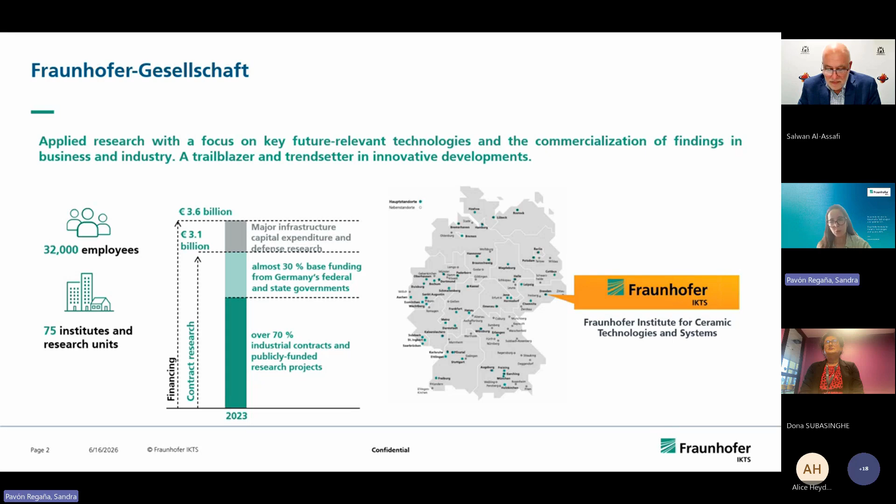As an applied research center, we go through the complete value chain, solving real problems from industry. Fraunhofer is around the world, especially in Germany. You can see in the map all the sites and institutes we have. We are 75 institutes within Fraunhofer society, more than 30,000 employees around the world, and I belong to the one on the right side, in Dresden, the headquarters called Fraunhofer IKTS.

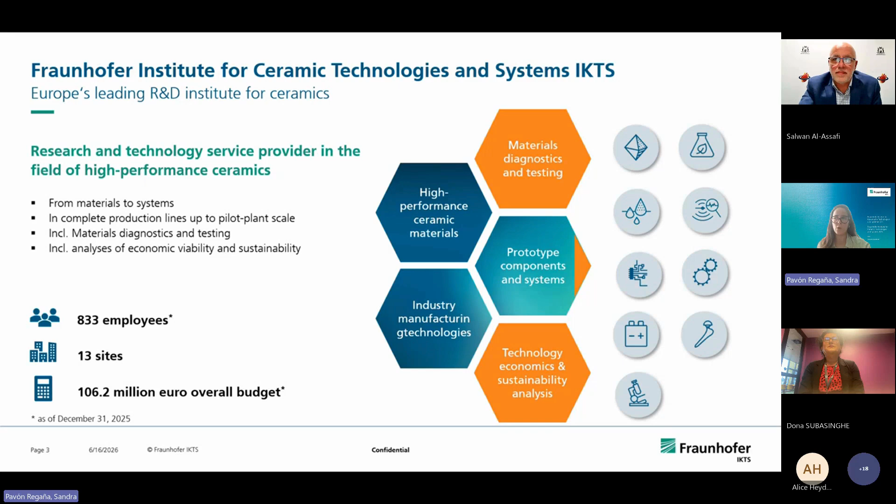What we do in IKTS focuses on developing ceramic materials, hence the name ceramic technologies and systems. We don't only focus on material development, we implement it across different value chains, in production and also in recycling. We are a little bit more than 830 employees, and from Fraunhofer IKTS alone we have 13 sites. I belong to the headquarters, but all the pilot plants we have in recycling are close by. I'll give you an overview a little later.

How we collaborate with academia as well as industry is by establishing collaboration and complementary synergies. We've done this since Fraunhofer started, because especially in Germany, academia is really strong. So we develop the fundamentals first, usually the focus of different universities, and then we apply and validate the ideas in the Applied Research Center, in Fraunhofer, bridging the gap between university and industry to provide not only the solution but also all the related IP. This duality and complementary synergy is our daily basis, and we think this can be a good start in Australia too.

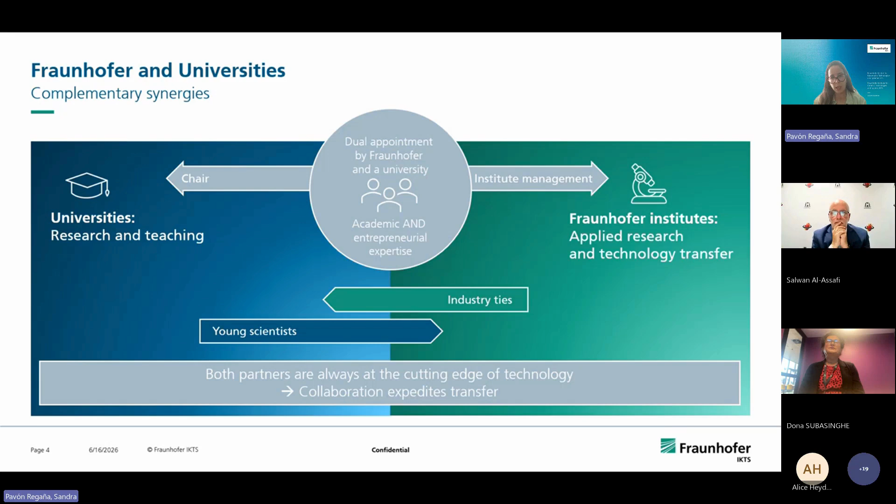Especially in Germany, where I work in Fraunhofer IKTS in Dresden, we have a strong collaboration with two different universities. One of them is the university in Dresden. In fact, the head of our institute at Fraunhofer IKTS is also a professor there, which is why the collaboration is really strong.

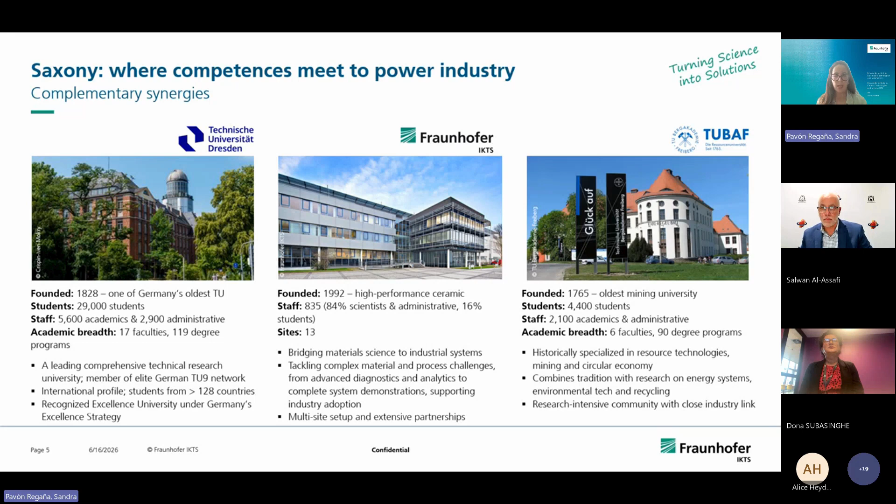Also from a recycling point of view, where I'm placed, all the recycling pilot plants are really strong in Freiberg, the oldest mining university. We have different collaborations and synergies there for developing the complete value chain, trying to tackle all the challenges from material development until production, including recycling, to fulfill circularity and the challenges of the energy transition.

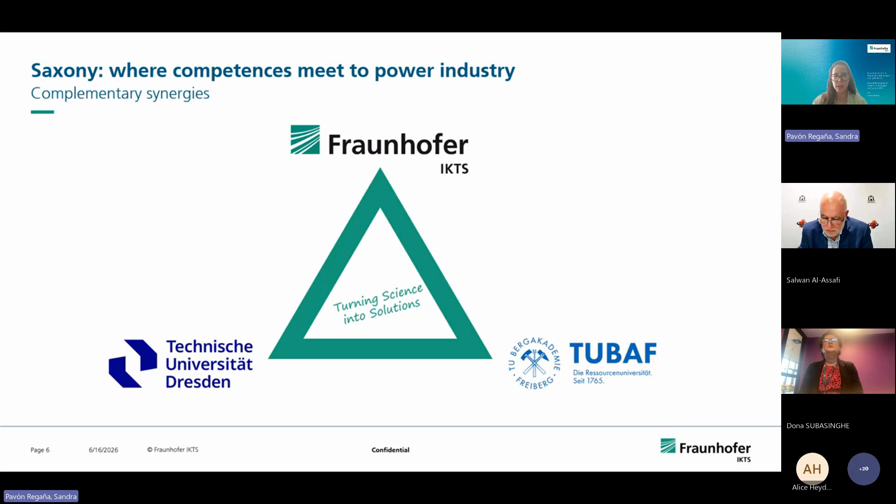That's why we're trying to be more present in Australia, to understand how the market is, and trying to provide and establish the same thing we already have here in Germany, but also synergies and partnerships.

How do we develop from scratch until industrial implementation? We start from the idea base, trying to develop an alliance. Usually the company comes to us and tells us what the challenge is. It can be different ones, from a technology point of view to how to adapt the process and value chain they already have, but with new input material - how to adapt current processes and technologies in their facilities with the new input material we want to test.

Then we establish R&D projects, and we provide all the guidance through the entire value chain, establishing this partnership. Once the idea is validated at laboratory scale, we move to the next phase: prototyping the solution in a pilot plant, including techno-economic balancing. Without techno-economic balancing, industry is gone, so we have to implement that from the beginning.

From primary and also secondary sources, we believe our idea and our strategy is trying to develop holistic approaches. What I mean by holistic approaches is that regardless of the input material we have, we are trying to develop the complete value chain.

We believe technologies should be flexible, because the raw materials we have today won't be the same in 3 or 4 years, especially from a secondary sources point of view. All the production and technology from the production side is developing and evolving through time, which means our recycling facilities have to be ready from the starting point to tackle the challenges and solutions of tomorrow. So we are developing different technologies and circularity concepts.

We take into account the planetary boundaries, so all the regulations - especially for us, usually Europe - but this is not the only main regulation and jurisdiction we have in mind. And when we're developing everything, we try to automate as much as possible.

We try to develop all the metrology, sensing, and digitalization from the beginning in order to have full control of the full pilot plant in the facilities of the clients. This means we are tackling primary sources and also secondary sources from end of life products, as well as production waste.

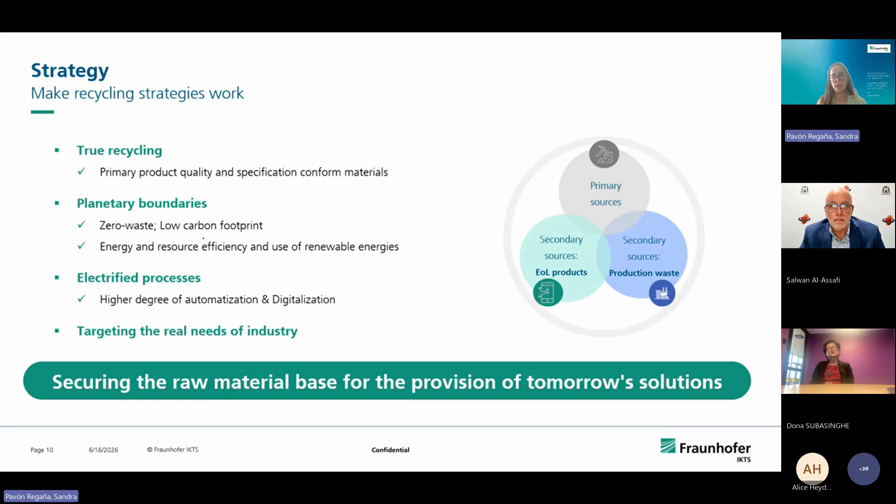The sustainability and cross-sector solutions for water, energy, and food security is a mantra for us. In order to implement in the industry and tackle cost efficiency in recycling processes, we have mainly four research areas. One of them is closing the loop.

All the waste produced through the process - we try two different approaches. One is trying to recirculate this within the same process, or we try to make this waste transformed into a resource for another industry. So we are selling this waste product that for us is not waste, because it's already a resource.

The second one is smart processes. Like I already said before, we try to include digital monitoring to optimize the processes and material recovery. So from the beginning, we try to establish digitalization from the start.

Usually when clients come to us, they already have something in their facilities, so it makes no sense to start from scratch or start from the beginning and do everything new. We try to adapt the already available technologies, facilities, and pilot plants they have, in order to reduce complexity as much as possible and increase cost efficiency.

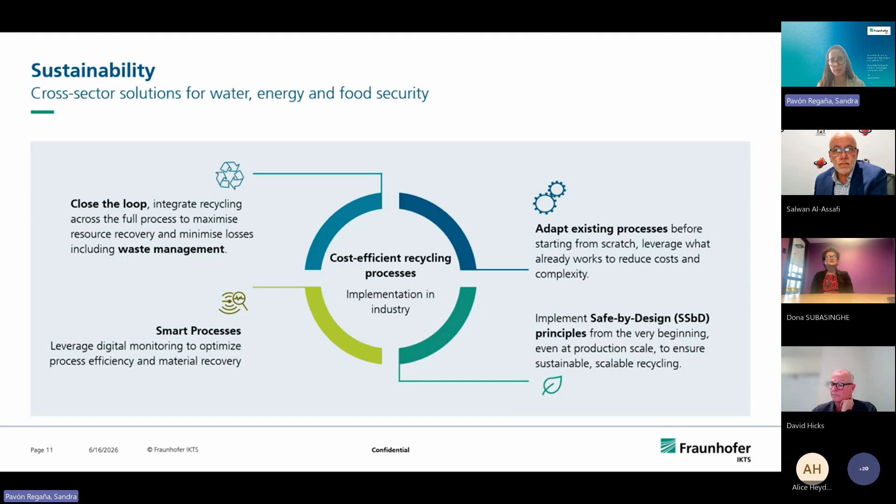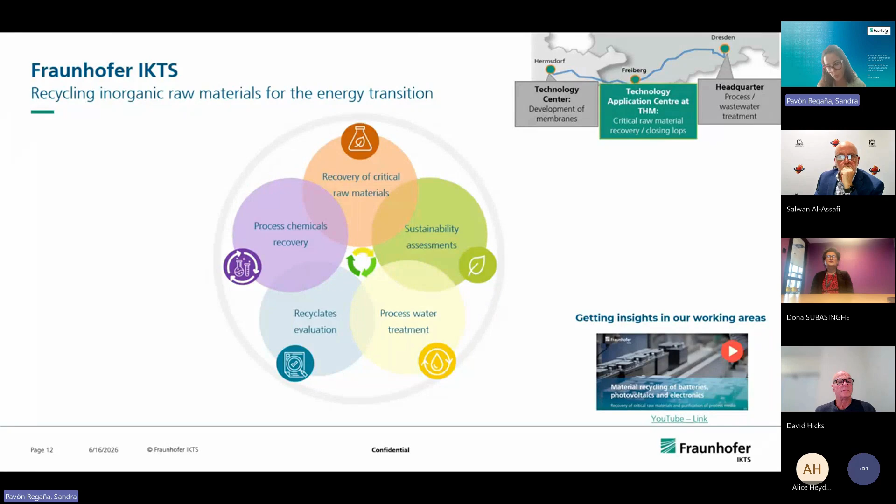Obviously, we are focusing on hydrometallurgy - hydrometallurgy means water, hydrometallurgy means chemicals. In lila and also in yellow are really key areas where we are really good at. We have all the facilities for process water treatment as well as process chemical recovery. And afterwards, we are doing the assessment - LCAs, LCC, and TEA, techno-economical assessment as well.

So which technology do we have in order that you can see if this can be useful for you and for your challenges. I'll try to summarize - obviously we have more than that, but I try to summarize to not talk for 4 hours. One of the main cores for us and the main areas that we have is lithium.

We have 2 processes that we can run in a semi-pilot plant. So we have the COOL process, the one that I will explain later - that is the use case that I already selected for today. We have a 230 liter autoclave in our facilities, and this process is already patented by the University of Freiberg, and we are the ones responsible for the validation from primary as well as secondary sources. So that means it's a holistic approach.

And we have a second one that is jointly patented, called the FEEL process, patented together with the University of Freiberg, but IKTS was also involved here.

From the metal separation side, we have the common technologies - solvent extraction in batch modus as well as continuous modus, including membrane contactors. It makes sense because we have a site that is developing the ceramic membrane contactors. Then we have ionic exchange, precipitation, complexation, crystallization, and so on.

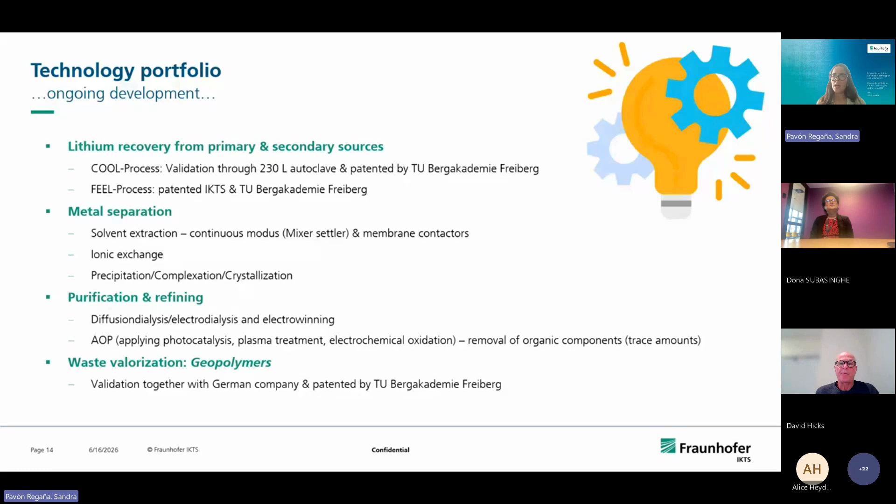And the last one that I think is important for you, or where I think there could be some questions, is how to valorize the rest when we are talking about primary sources. We are already working with geopolymers - I will explain what these geopolymers are afterwards.

So from a purification and water point of view, we are considering water as a resource and not as waste. That means we are trying to clean this water once it's already processed through the different processes we are developing, and we are trying to reintroduce this water within the same process.

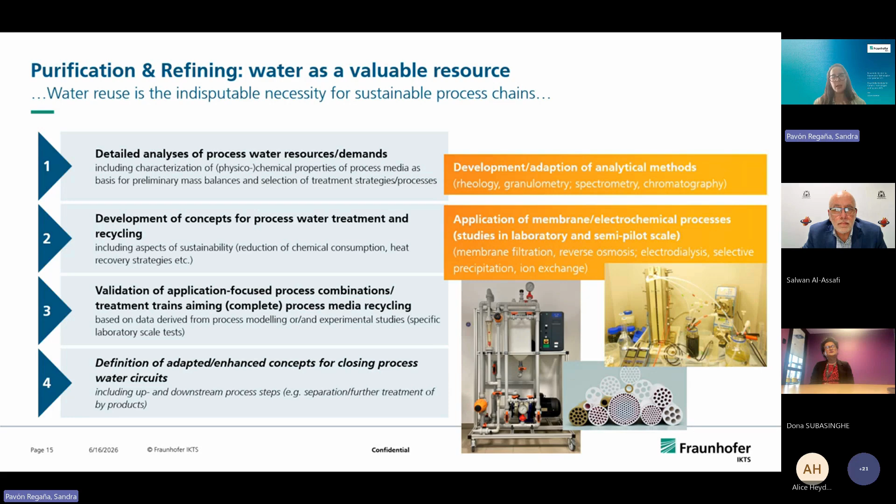We have here some application membrane pilot plants, semi-pilot plants, and we can tackle all the steps in the value chain. So we can develop the membrane contactors ourselves, and handle the setup until the end. We are responsible for making all the setup from this semi-pilot plant, and also for using them and validating the process.

From the assessment point of view, how we are working is we try to monitorize - meaning we introduce all the engineering side for monitoring. Then we do modeling and visualization tasks for evaluating the different scenarios. And when we are evaluating, we can identify where the process can be optimized.

And this is not only once - I want to tell you that this is an iterative process. We cannot only do this once and that's all, because obviously we are running the process in client facilities with different input materials. Input materials can be similar, and already are similar, but will never be the same input material, and that is why we have to iterate that.

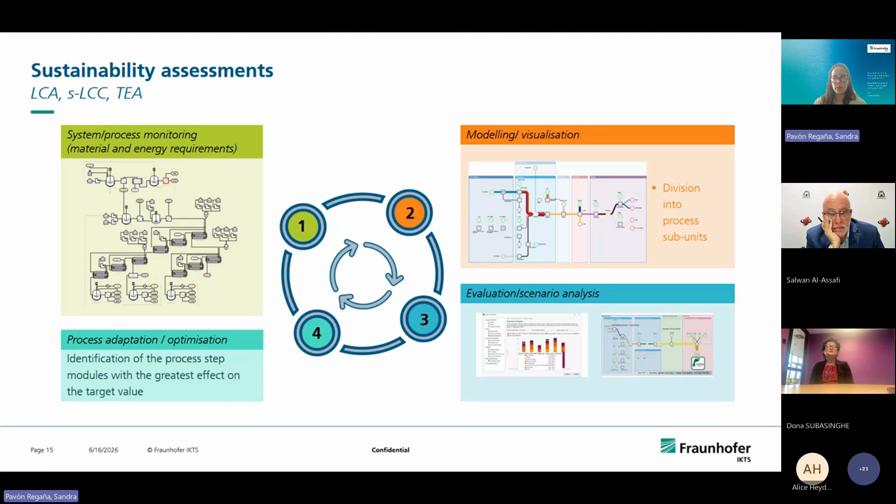So now I would like to go through the use case that I already selected, and I focus on lithium. Why am I selecting lithium? 3.5 years ago we started this big European project called Metallico.

To boost the energy green transition, critical raw materials need to be ensured, especially in Europe, where we don't have so much primary access. So we wanted to have a project to recover these battery metals from primary and also secondary sources, secondary sources meaning tailings.

The objective for us within this project is to recover these valuable materials from primary and secondary materials. We are demonstrating sustainable production because at the end of the project we are at TRL 7, meaning full pilot plants, or at least that's what TRL 7 means for us, it's a scale thing.

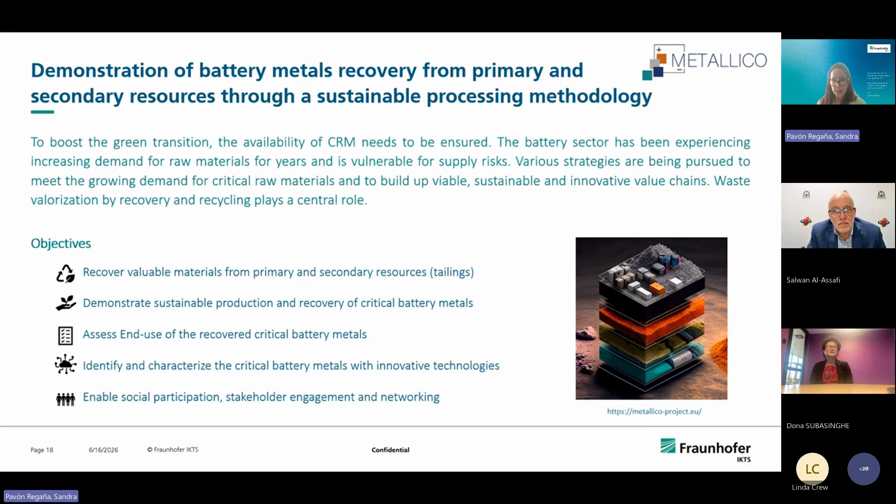We are also integrating and enabling social participation and stakeholder engagement. This is really important, especially in Spain, where the coordinators are placed. We have different mines, but not all of them have the green light and permissions to open. So we wanted to engage people to understand what mining means and try to get rid of the concerns they have.

The energy transition and electromobility is one of the cores, and batteries are one of the key resources. If we look at a schematic battery on the right side, from the 34 list of critical raw materials from Europe, you can see that almost all of them are in red, meaning all the metals except aluminum are critical, both from a supply risk and strategic importance standpoint.

So if we want to continue developing batteries and also recycling them, we have to tackle all these metals, including the main ones: lithium, manganese, copper, nickel, cobalt, and graphite.

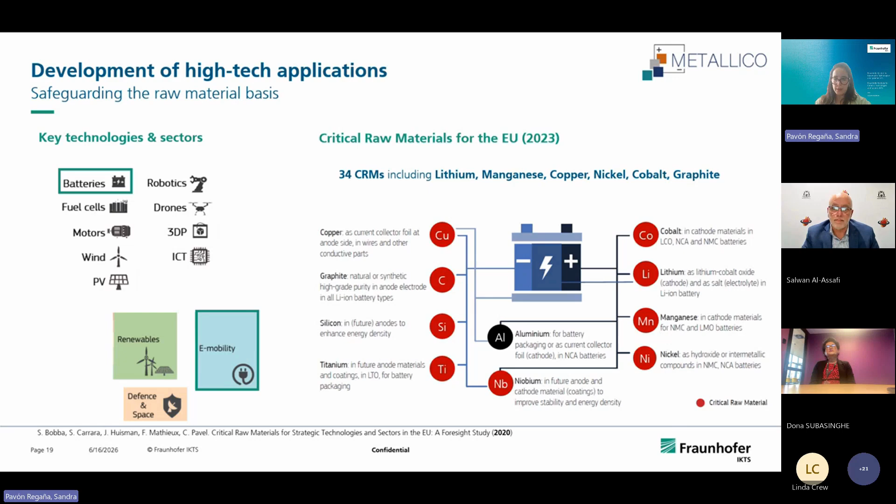Now going a bit deeper into this project: we have 5 different processes for metal recovery from primary and secondary materials. We are 21 partners from 9 different countries, 50% of the consortium are companies, so we are collaborating with them. Their main role is implementation, we develop the process but they implement it in their facilities, including mining companies as well as end-user valorization companies.

We are producing different products, and then they test these products in different applications. As you can see on the right side, there are different processes. The COOL+ one, which I'll explain later, is CO2 leaching based.

Then we have the TAILCO process, focused on cobalt recovery from tailings. PURGES is also about cobalt recovery, from pyrometallurgical refining processes. CONI targets cobalt and copper, sorry, this is a mistake in the slide, and COMAN covers cobalt, copper, and manganese from tailings generated in ore concentration plants.

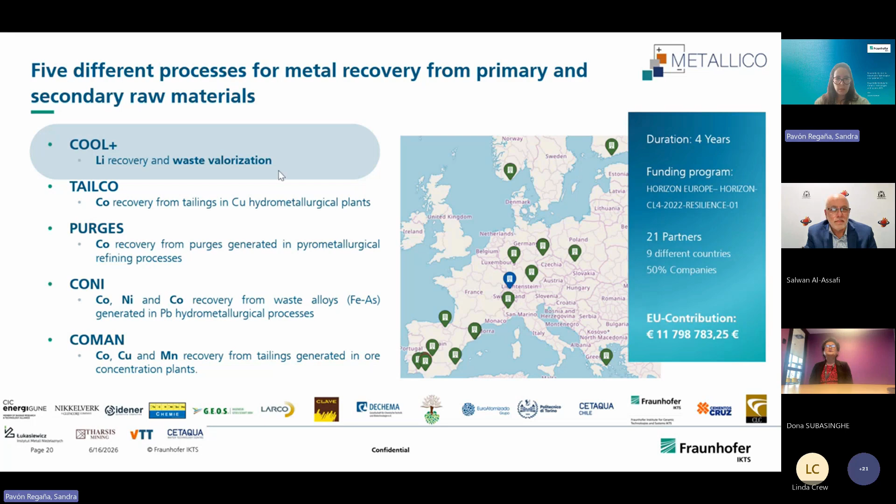Now, why lithium: the problem we have is that from primary sources the concentration is really low, and from secondary sources there are many types of batteries, both primary and secondary, and from the secondary point of view we have a lot of concerns about security and safety. The scenario for the next 30 years is that 25% of lithium demand will be covered by secondary lithium, obviously not all of it.

In recent years, the focus was mainly placed on cobalt and nickel recovery and not on lithium. The processes already established are mainly pyrometallurgical, meaning lithium remains in the slag, and recovering lithium from slag is possible but really challenging economically. So the consequence is we need recycling of secondary sources as well as tackling primary raw materials.

That's why we are trying to develop this holistic approach with technologies that can work regardless of the input material. Especially in Europe, we also have this challenge from supply risk, because production and reserves are outside Europe, mainly placed in Australia, Chile, Argentina, and China.

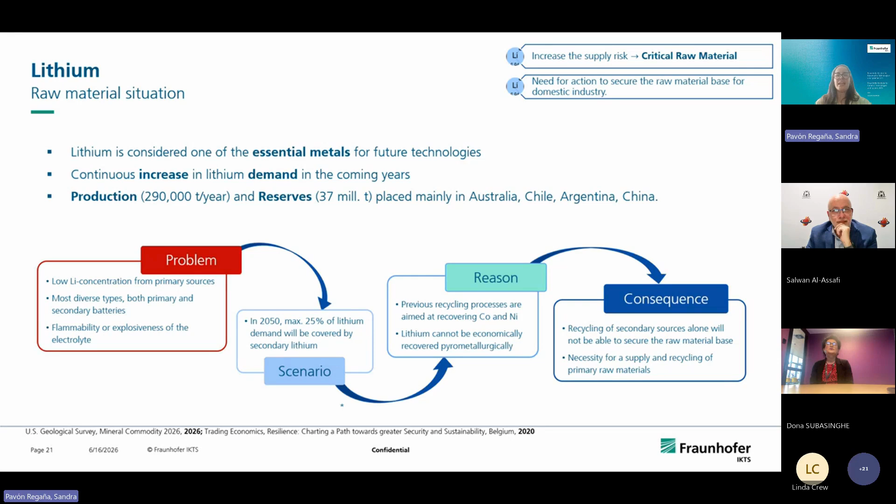Now I want to present the COOL+ process, a holistic processing of primary and secondary raw materials. We can tackle and mobilize lithium coming from primary sources like spodumene, zinnwaldite, lepidolite, and petalite, as well as lithium-based material, meaning from the black mass.

The pre-processing is obviously different, so we cannot do the pre-processing the same way from primary and secondary sources. From the primary side, we need thermal activation, usually to change the phase of, for instance, spodumene from alpha spodumene to beta spodumene, making the mobilization and recovery of lithium more available.

From batteries, what we do is first a discharge, then mechanical treatment - crushing, grinding, sorting - in order to have the black mass. The black mass is where all the valuable metals are placed: cobalt, nickel, manganese, lithium, and also graphite. Then both are merged in a leaching process with CO2.

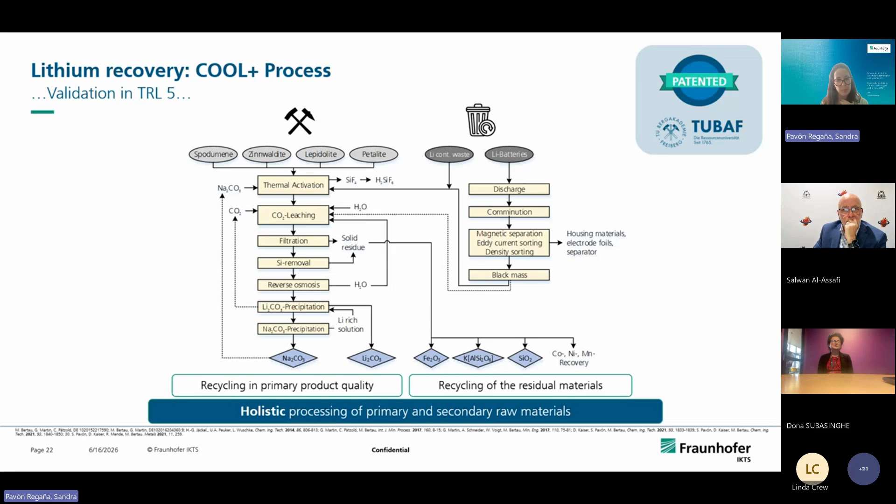But these are not a problem because we can proceed with the downstream process going through silicon removal and then reverse osmosis in order to do the refining - not only concentrating, but also making the last separation in order to proceed with the lithium carbonate precipitation.

So what we were doing for the last 3 years: we got spodumene from Nigeria with lithium content around 3%. We start with the thermal activation, adding sodium carbonate.

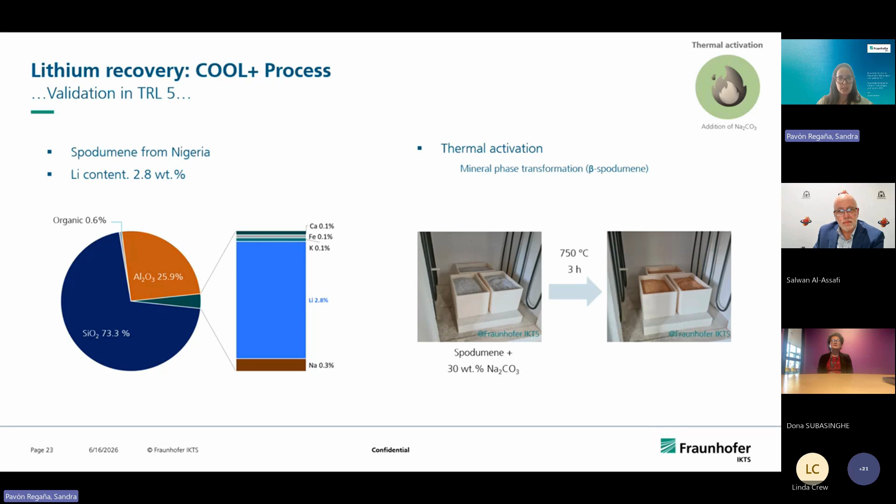And then we could decrease the temperature from 1,100 degrees to 750 through 3 hours. And then we already have beta spodumene that can be processed directly through our reactor.

This is our pilot plant in Freiberg, in our Fraunhofer facilities, a 250 liter pressure reactor. We are adding this activated spodumene sample together with water, increasing the temperature and pressure using a solid-liquid ratio of 80 for 3 hours, and then we are able to recover 75% of lithium.

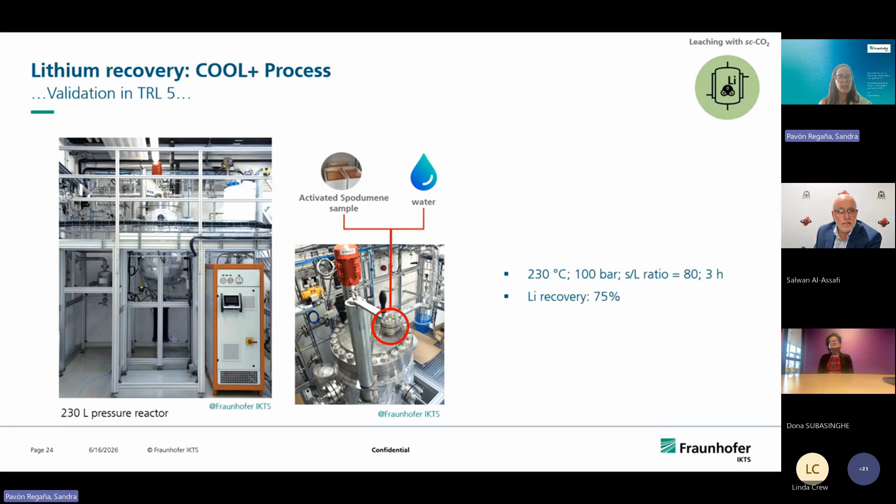That is why I said before that we are in the last phase of optimization. We are trying to increase this percentage in the pilot plant to 80-85, in order to get the threshold requirement from the battery side regulation, which claims that we must recover 80% of lithium. So we are on the way.

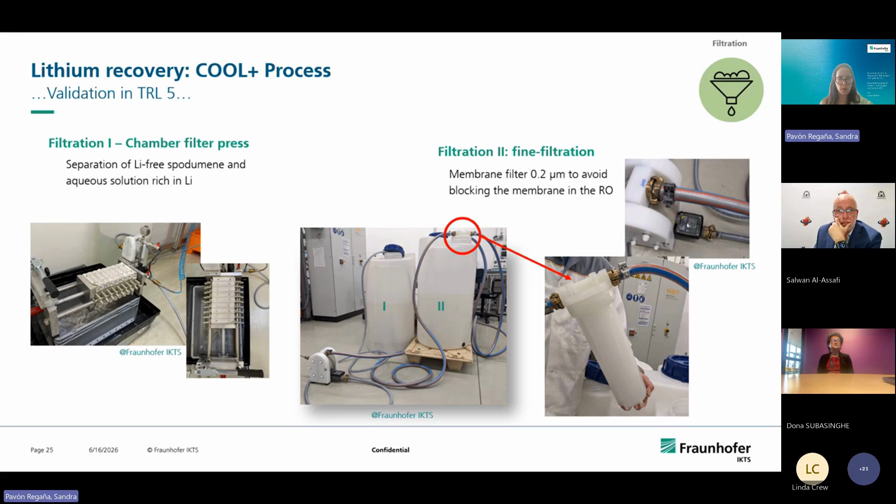Once this is done, we have to cool down overnight, obviously. And then we proceed with the filtration. We have 2-step filtration: first a chamber filter press to separate the residue, and then a fine filtration to avoid blocking the membrane in the reverse osmosis.

Once we have done this, we could proceed with electrodialysis, but we have some challenges. We have silicon there, and we got some problems in our membrane, so we need to switch technology. That is why we replaced this electrodialysis technology with reverse osmosis.

I want to point out here that we also had the challenge of monovalent membranes. This doesn't mean that they don't exist - we know these monovalent membranes exist, but unfortunately, due to some exclusivity partnerships from the producer of this membrane with other companies, they were not able to provide us this monovalent membrane. That is why we have to go through reverse osmosis in order to concentrate lithium in the retentate.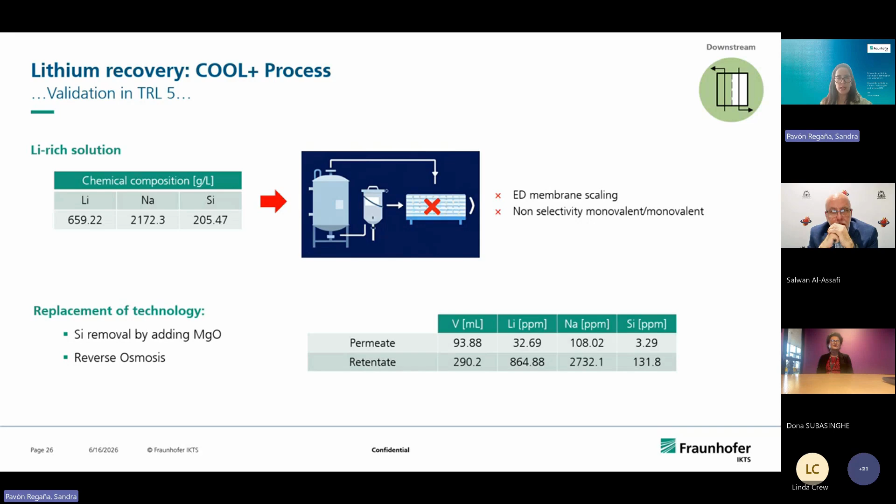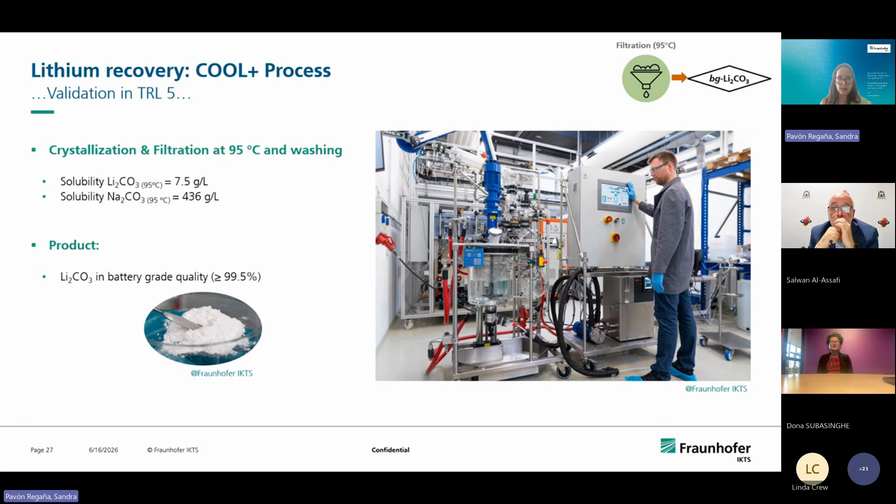And then we were able to proceed with the crystallization. It's not a problem for us to add sodium carbonate because we can consider the solubility of sodium carbonate and lithium carbonate, and that is why we are able to get lithium carbonate in battery grade, purity more than 99.5%.

Now the question is, okay Sandra, great, you are able to get lithium carbonate in battery grade, but lithium is 3% of the input material. What are we going to do with the rest? That is why we are going through this concept of geopolymer production.

It's inorganic and calcium-free polymers based on silicon and aluminum oxide. The properties are really similar to the cement industry, but a little bit better because the advantage this material has is that it's 100% built of secondary raw materials. That means we are saving up to 80% of climate damaging CO2 emissions.

So you can see the carbon footprint down compared to Portland cement, then geopolymers using metakaolin, and at the end, geopolymer with secondary raw materials. So it's really lower. This geopolymer production is also patented.

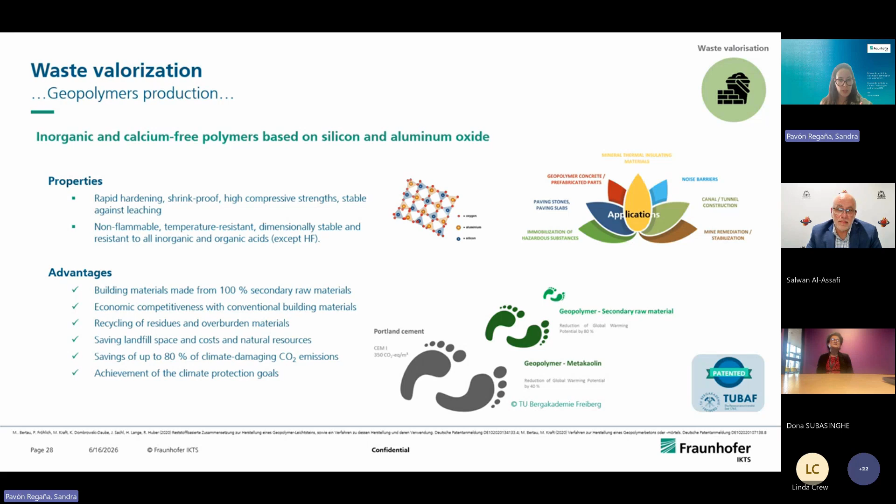So it's already validated. It's not something that we think could work, it is already patented, so it's working, these geopolymers.

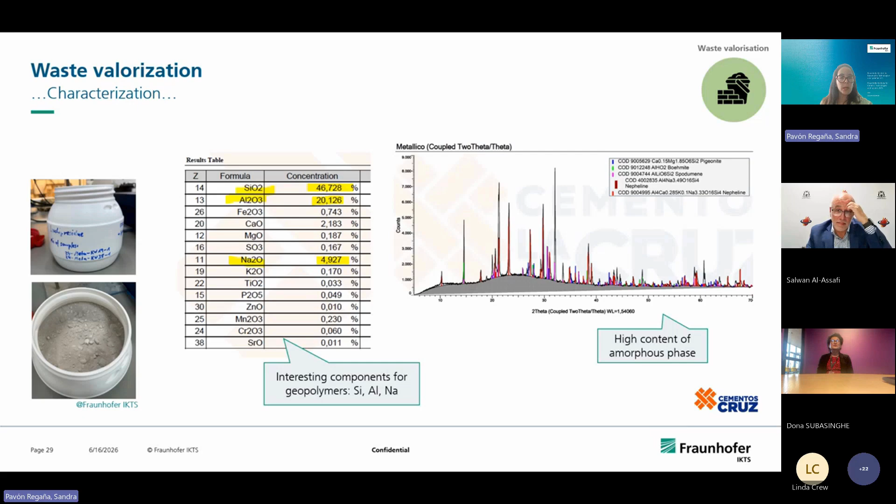Then what we did is a characterization of this lithium-free residue, and it looked really promising because silicon is there, aluminum is there, so interesting components for geopolymers.

Then, with a collaboration of another industry, we are not talking about lab scale anymore, we are going to already validation scale.

They already do some treatments: crushing, sieving first, then functionalizing the material with alkaline activation, and then homogenization, shaping, polymerization, and then making the molded body, and then the testing, so compression testing.

Unfortunately, it was not possible to make geopolymers due to the nepheline phase, that is kind of dead material, and we couldn't work with that. But it's a big but.

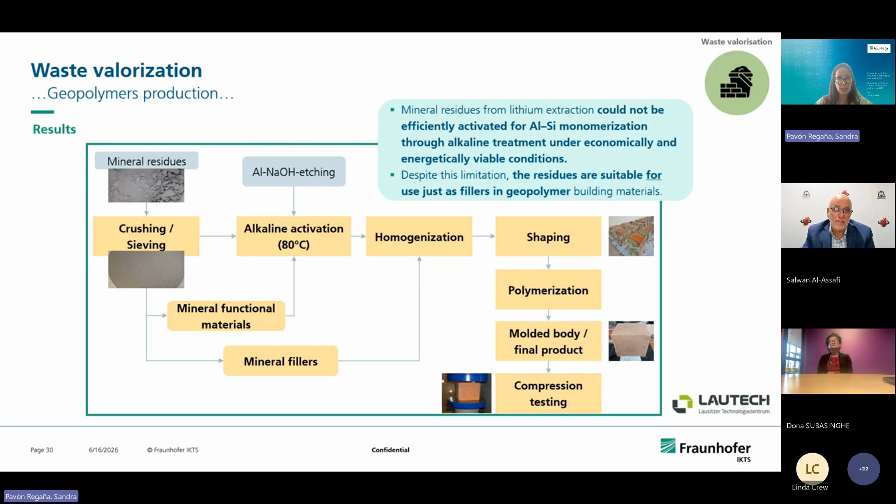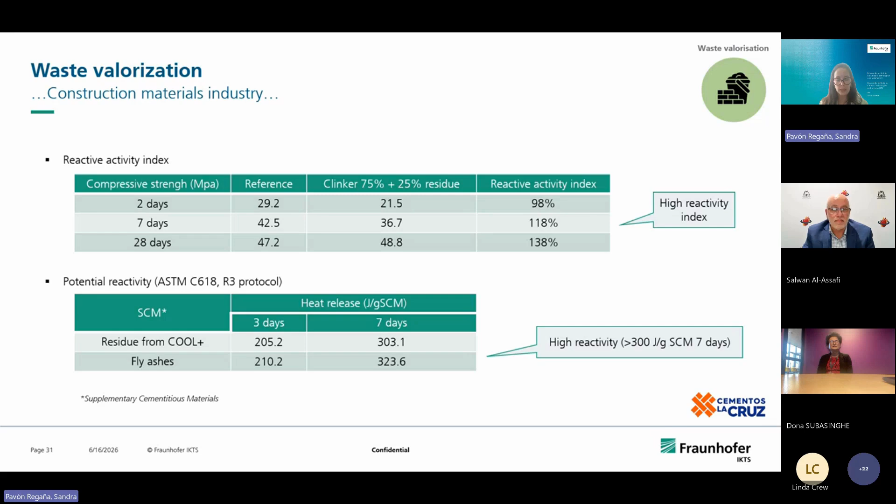Despite the limitation, the residues are still suitable for fillers in geopolymer building materials, as well as in the cement industry. With the cement industry, we had another collaboration with another industry, Cementos La Cruz, and they were doing validation of this material. It has high reactivity index and high heat release compared to other materials they are working with, like for instance fly ashes. So it's really comparable, meaning it could be possible to work with this in the cement industry.

So the outlook, I'm finishing this speech with really clear notes. For us, it makes no sense to work only from a technology point of view, or on one step of the value chain. We are trying to produce the complete value chain in order to make the sustainable metal supply chain production with innovative processing technologies.

Obviously, for that, we need to develop technologies capable of fulfilling the market requirements, so holistic approaches, and we need to increase the processing intensification using modular implementation, that is scalable industrial deployment, so on site from our client, and integration into existing flow sheets instead of starting everything from scratch.

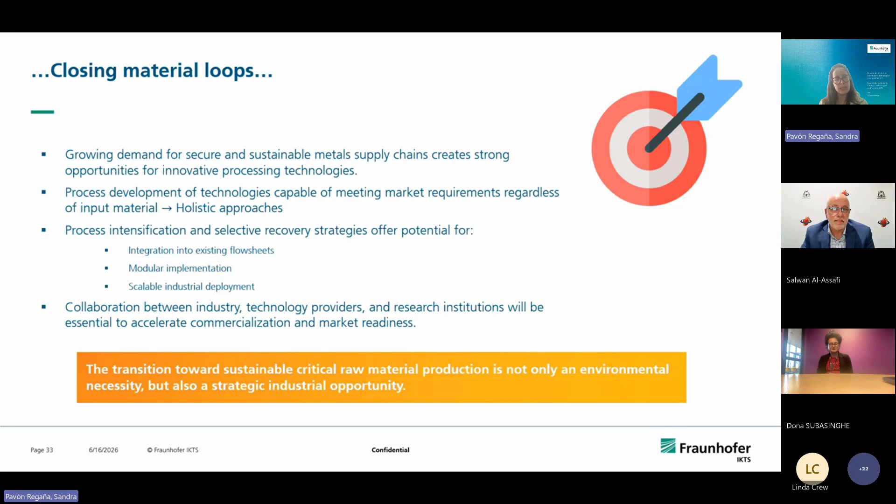And for that, we need the collaboration between all the stakeholders, so from industry side, technology providers, research institutions, in order to accelerate the commercialization and the market readiness. So that means that the transition toward sustainable critical raw materials production is not only an environmental necessity, but also a strategic industrial opportunity.

Thank you so much for your attention, and I will be glad to answer any question.

Thank you, Sandra, that's really great presentation. That's some really very interesting work that you guys have done. Most certainly addressing the entire value chain. I think that is definitely would make a big difference for industry. It's really critical to address the entire value chain rather than just focusing on one element or the other.

My questions, I've got a list of questions actually, but I'll just start with this. You mentioned that geopolymer didn't work. Alternatively, you can use it as supplementary cementitious material. Is that, or just as a filler?

Yes, can be both. So we are trying to open the application of this waste material, first only from geopolymers. It was not possible due to the nepheline phase, but can be done, can be used as a filler from the geopolymers that was already validated, as well as from the cement industry. So you can select which application you want to use depending on the necessities from the industry. Like I already mentioned, we are working directly with two different industries, so they are testing that in their own facilities from the production that they are doing daily, something that they could integrate into the current value chains that they have.